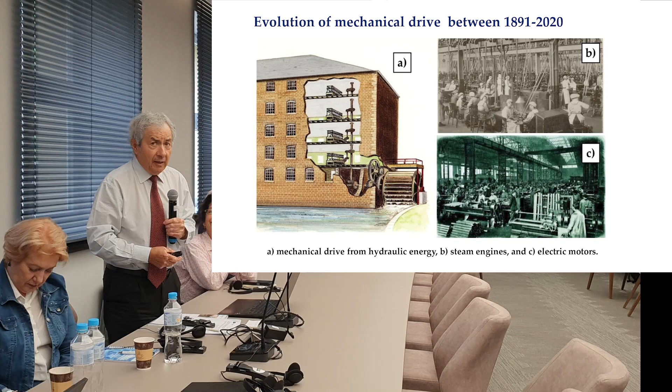There was a very important change in the world economy with the Industrial Revolution, which was initiated by using water power, namely textile companies. But when you are using energy from nature, you run into a problem. Sometimes there is no water.

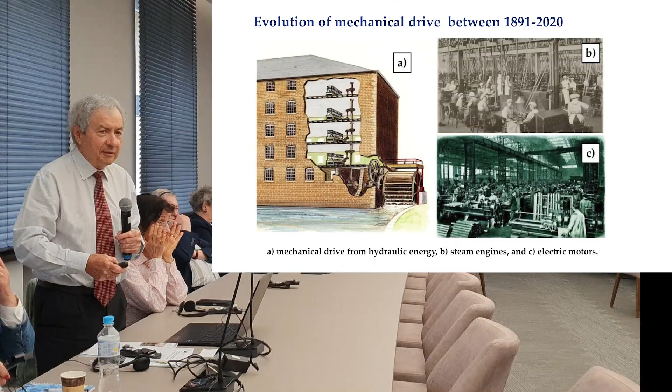So fortunately, around the same time in England, a steam engine was developed. So with steam, if you have enough coal or wood, the weather is not a problem. So basically, you change from the first factories based on water power to drive power based on steam power.

Even so, there is a common link between the two technologies. Namely, you have a prime mover and you had to distribute mechanical power inside the plant. You had shafts, belts, a mess in terms of operation. Fortunately, by the mid-19th century, electric motors were developed.

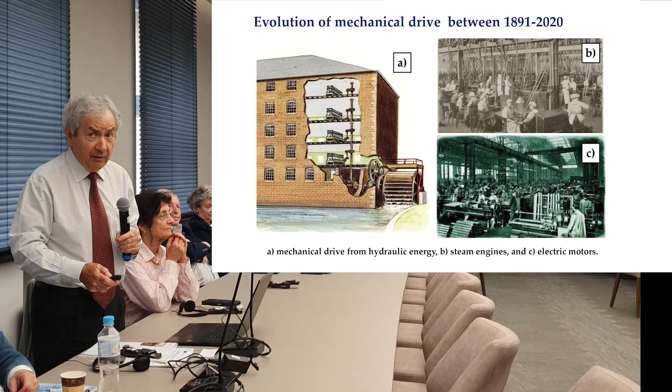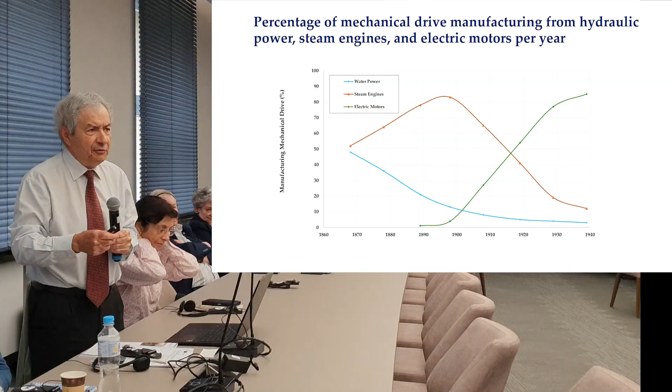But then, as the 19th century came to a close, there was a very fast change to electrification. It's really, if you think about it, in a space of a few years, you change from steam to electric motors in industry.

And when we situate how this evolution happened, we started basically - the most important driver in the Industrial Revolution was the steam engine. And then we moved to the second Industrial Revolution, which was based on electrification. And one of the key machines for electrification is electric motors. So it started, and electric motors have been evolving with different technologies, different capabilities.

Then, very importantly, around 1970, we had the invention of the microprocessor. Intel invented the microprocessor, and the use of electronic intelligence made sophisticated automation possible. And by the way, it also improved a lot how motors can be used. So there is a synergy between motors and electronics, as I will say later.

And more recently, we are running into the Internet of Things. That's also very important for motors. And more, the use of cognitive systems and artificial intelligence. So I would say that we have been going through a change that is accelerating, by the way.

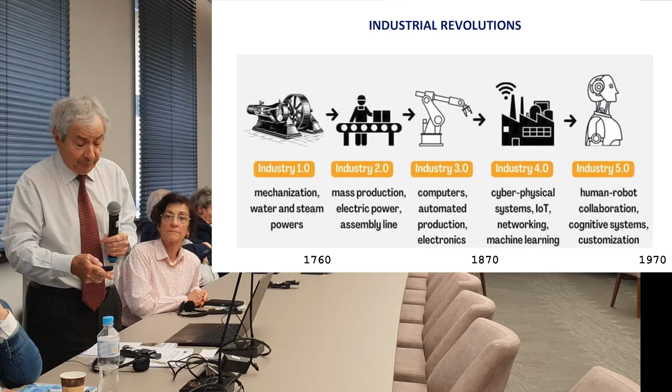Our hero, our superhero, which we are honoring today, was really an outstanding character. He was able to see very far in the future. There was not yet a three-phase system, but he imagined that if he had a three-phase supply, he could produce a rotating field and a very robust motor. So this is what makes a genius, to be able to see things that are not yet there.

So basically, the evolution for the squirrel cage induction motor is a very, very significant change in terms of capabilities compared with existing technologies. The induction motor compared with the previous motors, like DC motors, is much better in all respects. It has a higher power-to-weight ratio, is much more reliable, much longer lifetime, more efficiency.

It can be scaled. You can make very tiny motors. You can make multi-megawatt motors. So it's really absolutely amazing. And another capability that the induction motor also has, compared to other competing technologies, is its capability for direct online starting. Some sophisticated motor technologies are very good, but they need electronic controls. With the induction motor, you can basically start a motor directly from the network, which is very convenient.

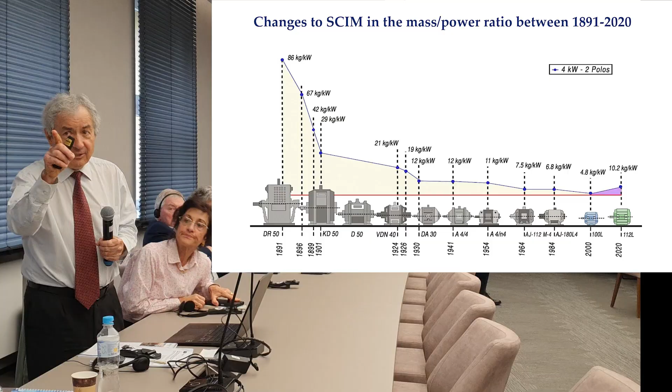Since then, a lot of evolutions have been implemented. The first induction motor was massive, a 4 kilowatt motor that weighed more than 300 kilos, extremely heavy. As you can see in this graph, there was a very significant trend to make lighter motors. Of course, a lighter motor uses less metal and is cheaper, and it's also important that the motor is not expensive. But you'll notice at the end that the trend to decrease weight reversed. I'll explain why later. It's sort of a paradox: the weight keeps dropping very fast and then suddenly starts increasing again.

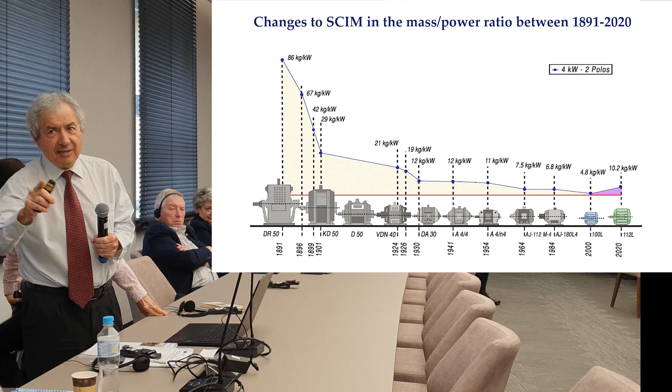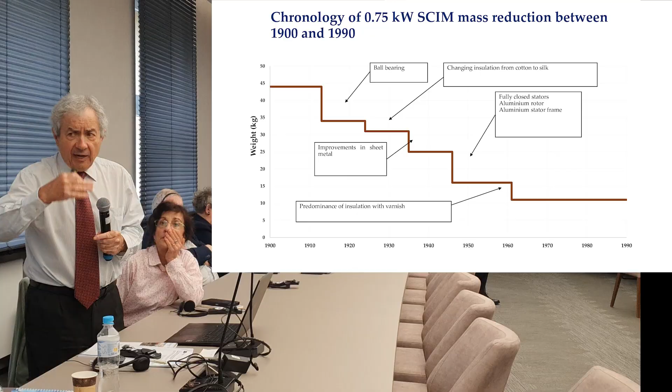So regarding why this happened, several important improvements were carried out. First of all, motors need support for the shaft, and the introduction of ball bearings produced a much more compact and much more reliable type of shaft support. Then other major improvements had to do with insulation, which was thick and didn't last long, so an evolution in insulation was very important. Also, in a motor you need coils run with current to produce a magnetic field, and you need a magnetic circuit to channel the magnetic flux. There were also very important changes here that I'll show in more detail. So basically all motors suffered a strong evolution in materials, construction, and design.

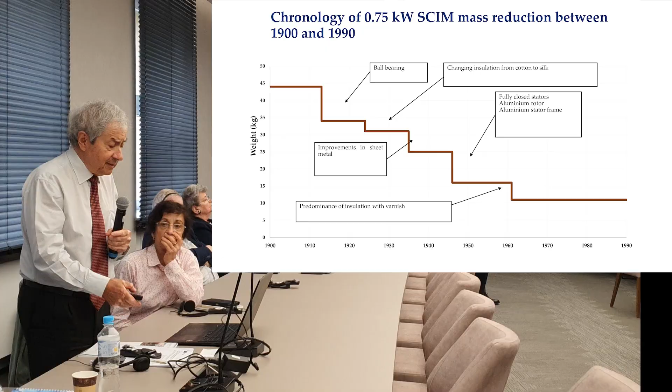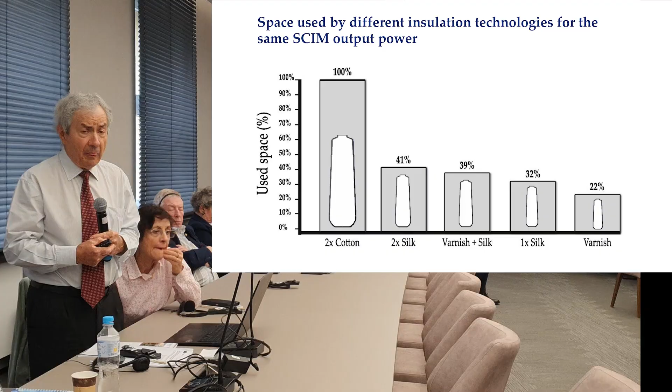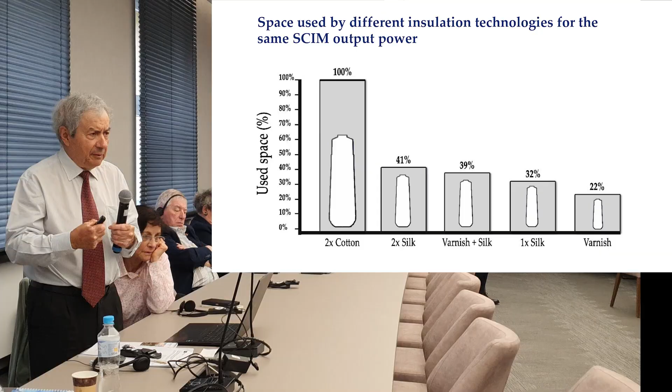This shows several cutaway views of insulation, starting with cotton, then silk, then a mix of silk with varnish, and finally varnish. Varnish is much better because it withstands higher temperatures, so it lasts much longer, and also because varnish is a good conductor of heat. When you have a coil with air voids, the transmission of heat is not as efficient. So it's important—it makes the winding more compact and improves heat transmission.

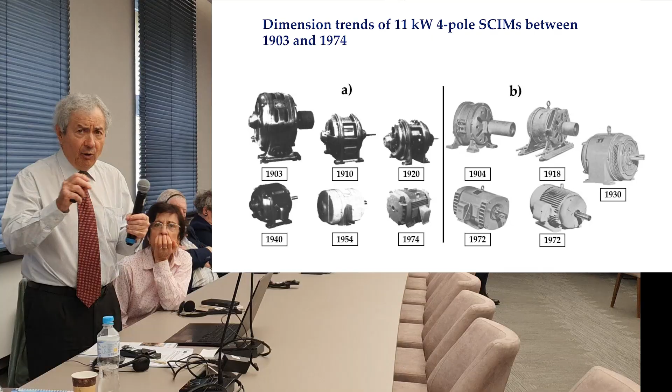This is an overview of how motors evolved over the past century, starting with open frame motors—large open frames for the same size, for the same power. All these motors are 11 kilowatt, so there was a drastic reduction in size and weight. The ones on the left are NEMA, that's the North America market; the ones on the right are Europe, IEC.

An important evolution you may notice is that initially you start with open frame motors, and later you go to enclosed motors. Why? If you're able to decrease the losses, you can avoid the entry of foreign materials into the motor—that's the way to do it. So you close the motors after there's a significant reduction in losses. You have a fan coupled to the shaft, and you'll see that in more recent motors the back part is a bit longer to accommodate the fan. So today, the vast majority of motors are totally enclosed fan motors.

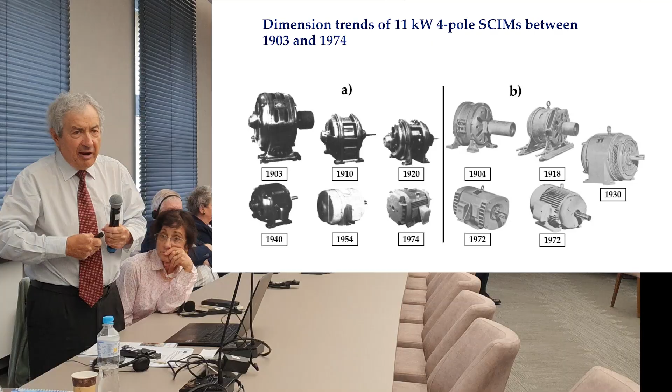By the way, I didn't mention—the induction motor is more than 100 years old. To be more precise, it's more than 130 years old. But if you go to industry today, more than 90% of motors are still three-phase squirrel cage induction motors. This shows how the technology, after suffering some improvements, is still the workhorse of industry.

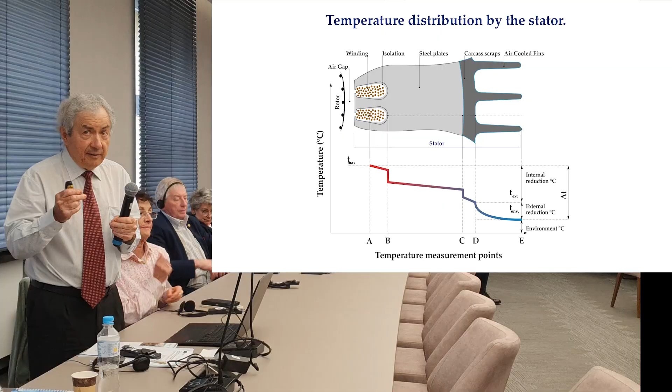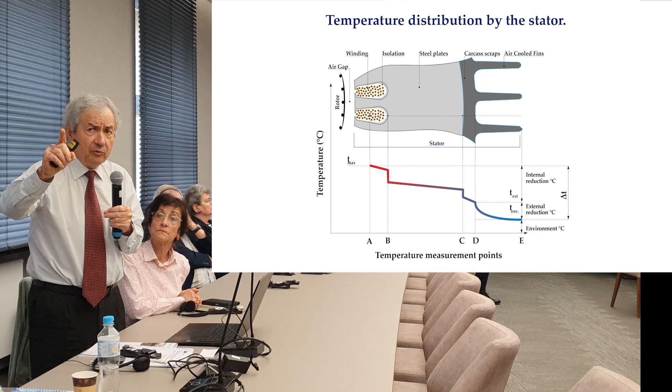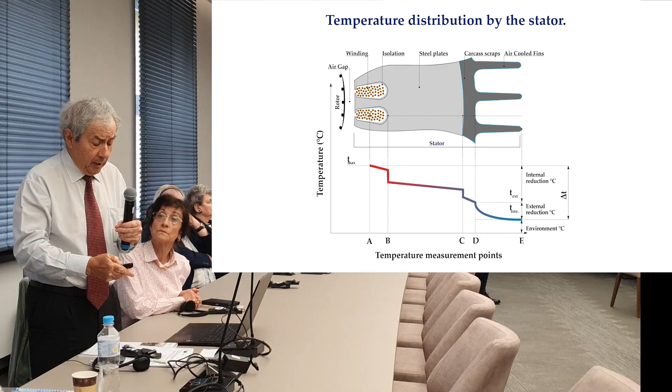Regarding one of the key issues: when you have a motor, you have current in the windings, and when you have current going through the windings, you have losses, and a challenge on how these losses can be removed. The new varnish insulation was a key step because it improves the release of heat from the grooves to the laminations. And you'll notice that on the outside, on the case of the motor, you'll see fins—these fins increase the external surface in order to improve heat transfer.

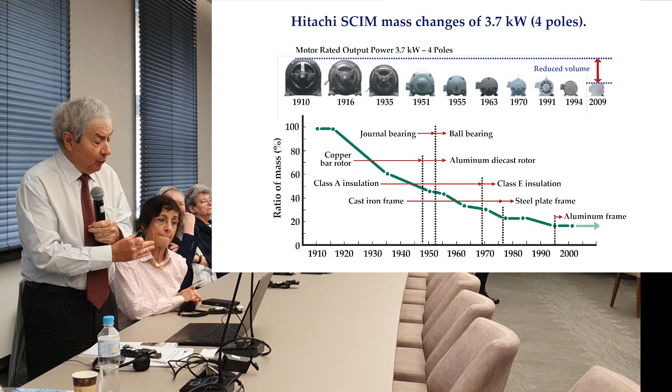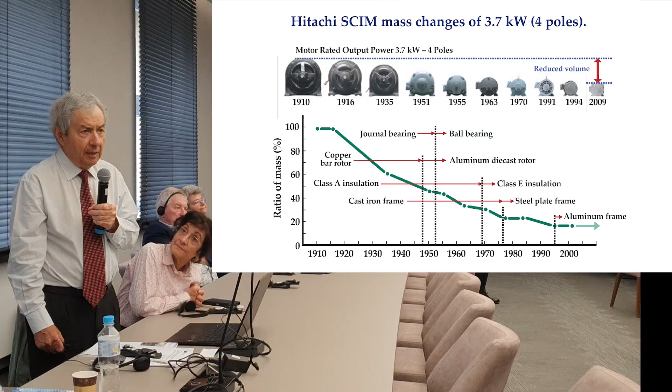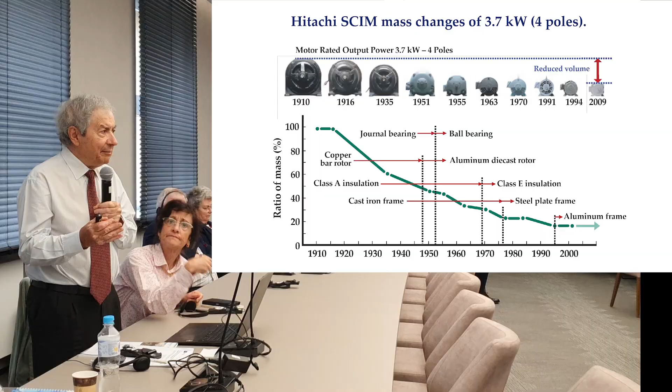When it comes to magnetic materials, there is also a very strong improvement in several ways. The magnetic material was made with higher permeability and higher resistivity by adding silicon to the iron, and also, very importantly, by using thinner laminations. Nowadays the laminations used are about 0.3 of a millimeter. But for transformers, an American company called Allied Metal, some two decades ago, developed a material called amorphous metal, and these plates are only 25 microns thick. So there are some companies experimenting with new motors that use this amorphous metal.

And basically, you slash the magnetic losses by 80%. You may see this happening coming into the market. So still a new improvement for motors, which might be possible in the near future.

You see here the evolution of motor efficiency for different power ranges during the last 80 or 90 years.

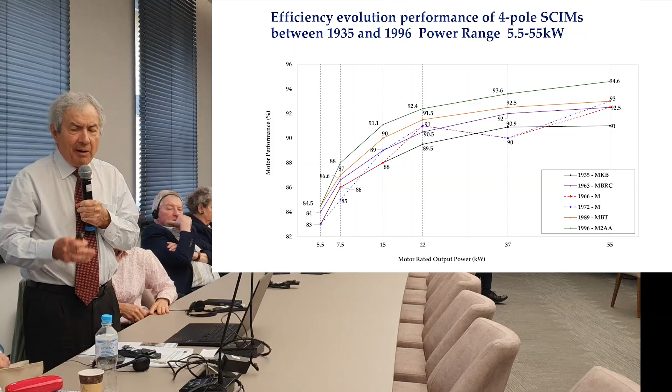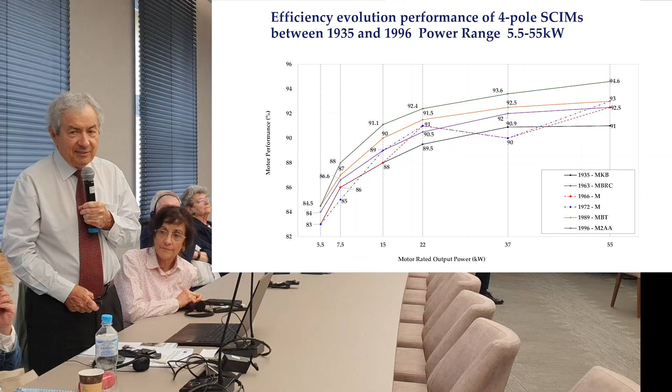You see something strange in the middle, that the curves - I don't have enough power here to project - but there are two lines that somehow are not improving much, and these lines refer to periods during the 60s and the 70s. Until the first oil crisis, electricity was very inexpensive, so manufacturers started making motors as cheap as possible by reducing the amount of copper and steel. This gave very inexpensive motors, but not a good choice because they use more electricity. So on a life cycle cost basis, it was not a wise decision to choose this type of technology.

This again shows how three manufacturers' motors improved through the years. You see the period of stagnation again, 60s, 70s, but there is a common situation: after the 90s, all improved very fast. Why is this? Because of incentive programs started in North America and also minimum efficiency standards. This was a stimulus for motor manufacturers to develop and introduce high efficiency motors into the market. So the same story, this type of stagnation in the 70s followed by an increase.

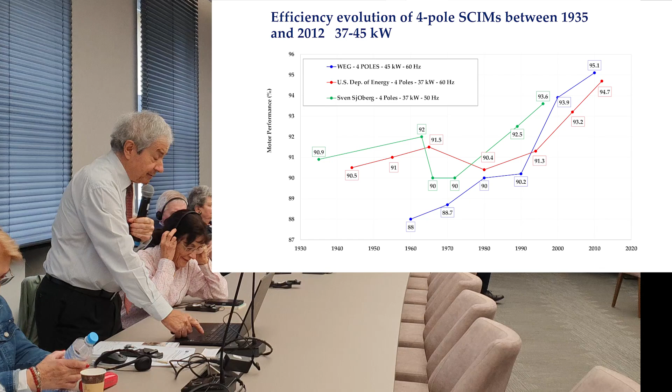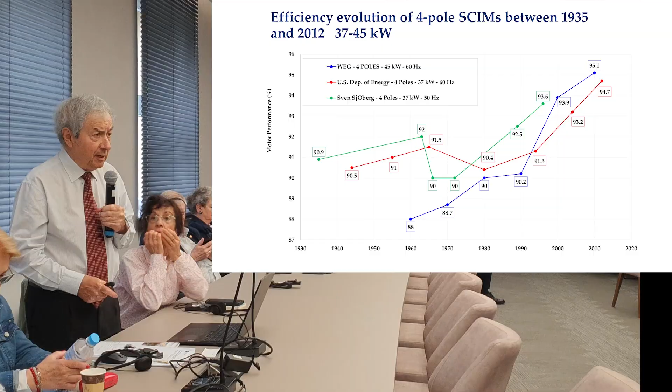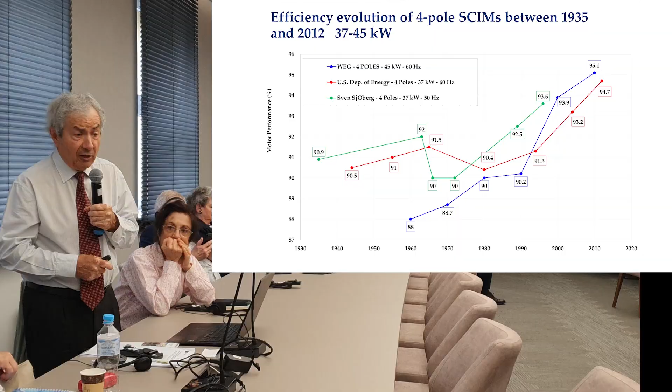When we look at the induction motor, it's quite good in terms of efficiency. We are speaking of motors that, depending on the power, have a full load efficiency of say between 80 and 95%, but still they have losses. So how can you cope with this?

The highest losses, the largest, are the stator losses, the windings. And what can you do here? You can improve winding techniques, reduce the coil heads, use concentrated windings. So manufacturers are designing in this perspective.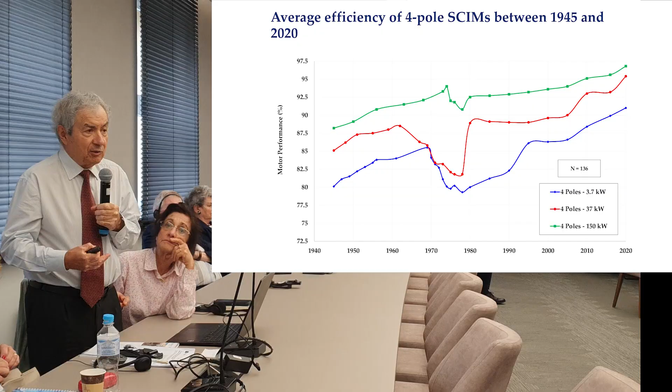Rotor losses - this is the principle of induction motor by using squirrel cage. By using squirrel cage with larger cross section, you are able to decrease the rotor losses.

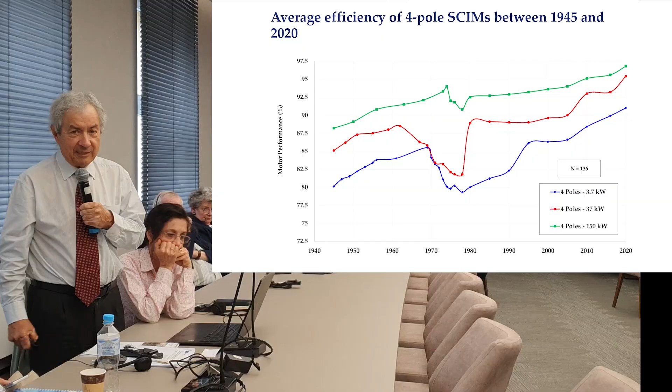If I would point to a less good aspect of induction motors, I would point that the rotor in an induction motor is always late. He's always trying to get the rotating field, he moves after the rotating field, but never is able to catch it. And there is a penalty, and the penalty is the rotor losses. If you are able to develop a technology where the rotor accelerates and catches the synchronous rotating field, no more rotor losses - you slash them, rotor losses are magnetic and electric, you cut them to zero. If the slip is zero, you still have the mechanical losses, but that would be a tremendous improvement.

And some manufacturers are working on this, on a kind of hybrid design in which the motor starts by induction and then runs at synchronous speed.

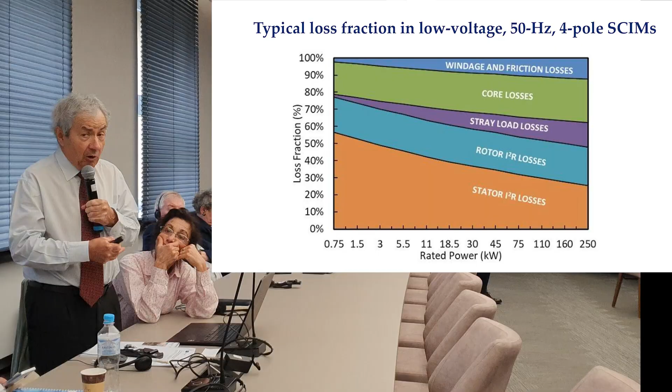Stray losses can be reduced by better design to minimize leakage. Core losses - better magnetic materials. It's happening progressively, particularly if we go into amorphous materials. Don't think it's something that cannot be done. In Japan, 50% of distribution transformers already use amorphous metal, because a transformer is connected 24 hours per day, and most of the losses in a distribution transformer are iron losses. So when they move to amorphous, it's really very important.

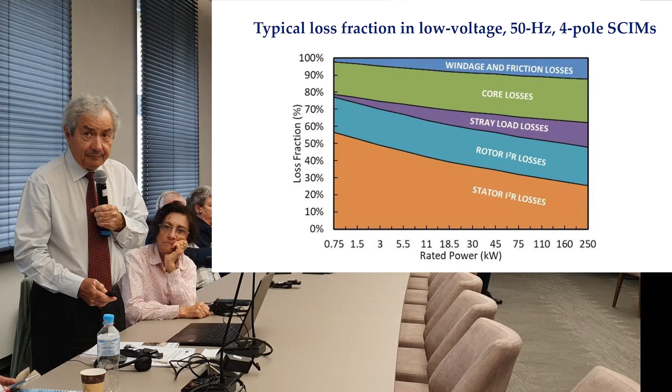So in this graph, there is an overview of the areas in which induction motors have evolved a lot during the last 100 years. And all basically go in the same direction: make the motor more efficient and more reliable. And the two things go together.

So I think the induction motor was a great invention, and is getting even better with this type of progressive improvements.

This is an interesting figure. When there was the introduction of energy-efficient motors in the 90s, you see two motors sharing the same case - one is a standard motor. From the outside, they look the same. But if you cut the case, what you see is the efficient motor, basically inside has more iron and more copper. Very easy to understand.

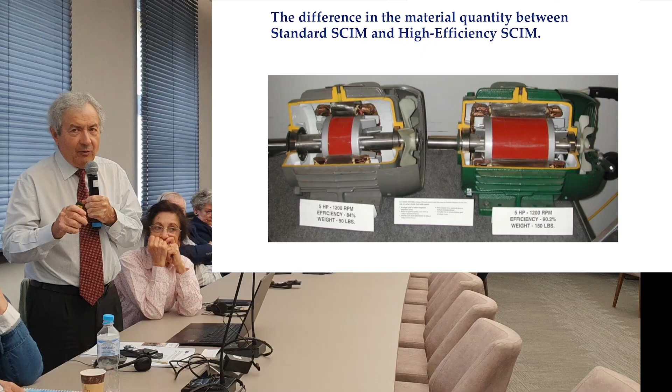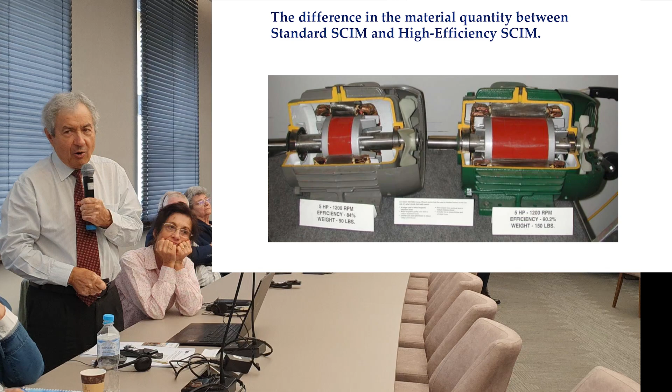Basically, the electric losses depend on the resistance of the windings, so if you put more copper, you decrease the copper losses. With magnetic steel, the same story, because the magnetic losses are proportional to the square of the flux density, so if you use more magnetic steel, you are decreasing the density. So if you want to explain to a person who is not an engineer what's the difference between the two motors: the more efficient motor has more copper and more steel. To say it in very, very simple words.

So is it still possible to improve the induction motor? Yes, it is. We already spoke about new magnetic materials, the use of hybrid rotors to make the motor synchronous. And there are some people, particularly a company working on axial flux motors. Axial flux motors are more compact and allow the use of concentrated windings. I'm not aware of an induction motor of axial flux on the market, but there are axial flux motors. Modern elevators use axial flux motors, but they're permanent magnet motors, not induction motors. So the field is still evolving.

And in terms of efficiency, before the year 2000, when you buy a motor in Europe and look at the nameplate, you had power factor, current, voltage, but no efficiency. A shame. You buy something that uses a lot of electricity and the efficiency is not written on the nameplate. Not anymore. Now IE classes are defined, like hotels have classes, 1-star to 5-star hotels, motors also have stars.

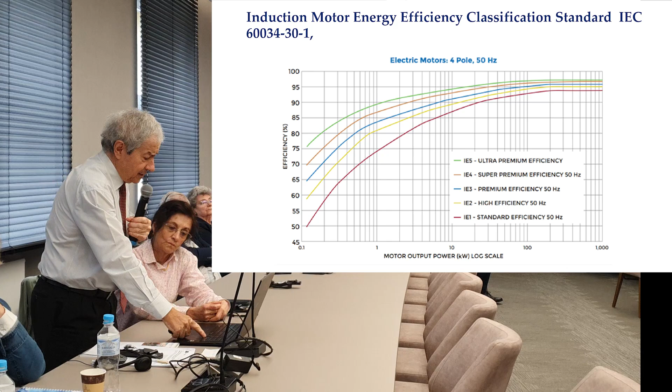So now you have classes defined on a world basis by IEC, adopted everywhere, China, USA. These classes, as we see here, there has been a trend moving up the scale on these efficiency values. In terms of engineering, there are many research groups around the world trying to improve the performance of the motor along the lines I mentioned.

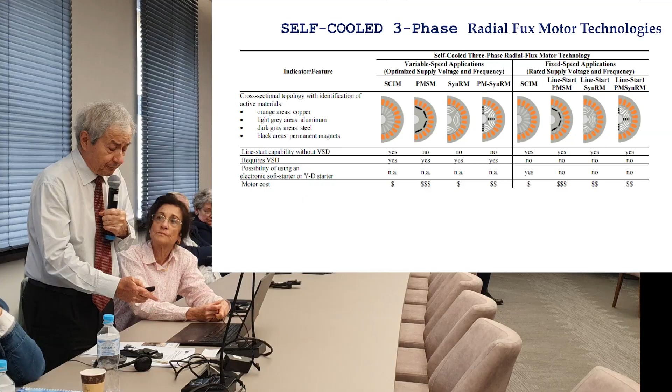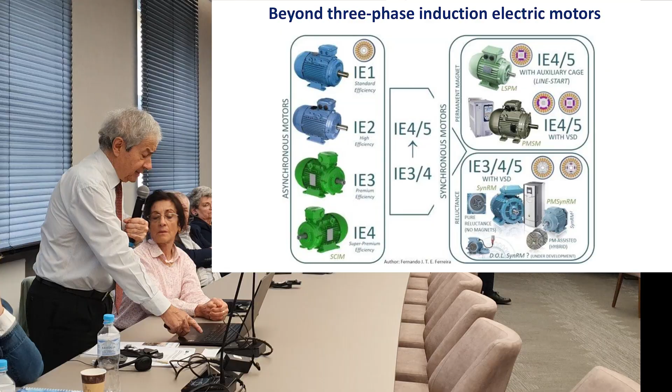And in the market right now, you have induction motors going from IE1 to IE4. Why not IE5? Because the amount of active materials would make the motor too heavy. So to go to IE5, there are technologies, namely permanent magnet synchronous motors or synchronous reluctance motors, which can achieve IE5 performance with a smaller amount of active materials.

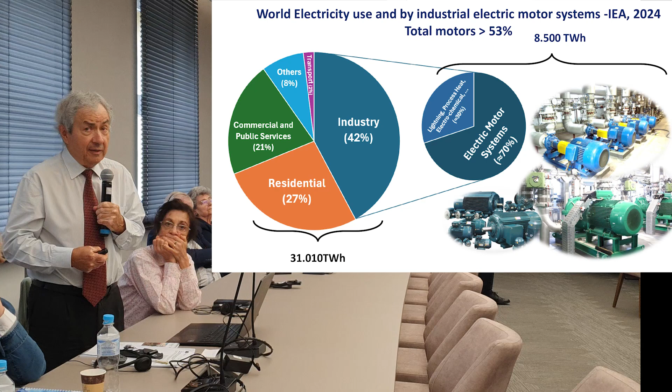Why is it so important to keep moving the efficiency? Because motors in total use more than half of total electricity used in the world, not just in industry. When you go to buildings, now not just elevators, heating and cooling are being done more and more with heat pumps. So there is an ongoing electrification of buildings, and the importance of motors, already more than half, has become even more important. So in terms of policy towards sustainability, it makes a lot of sense.

Minimum efficiency standards around the world: North America was the pioneer, 1997. DOE published the first energy efficiency standards, and then it has been a virtuous circle. Other countries are moving, so it's a success story because it's a win-win situation for everybody. People save money in their companies by using more efficient motors, and because we use less energy, there is less pollution. So this is really moving.

So since July 2023 in Europe, it is compulsory to use IE4 motors from 75 to 200 kilowatts, and the standard is going to be extended because the manufacturers said, well, if we have to make IE4 motors for smaller motors, we need time to adapt. But the idea is that very soon in Europe, IE4 will be compulsory. DOE is also projecting to do the same by 2027.

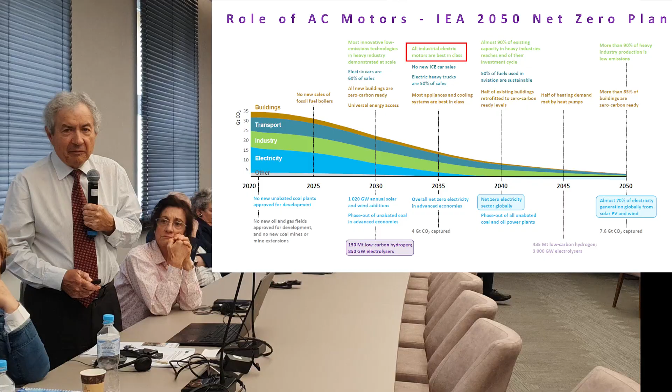So this is quite a successful story, the motor market transformation which has occurred around the world. The International Energy Agency, in the net zero roadmap to 2050, states that by 2035, all motors sold must be IE5. So because of their importance, it's really very important that we look at this.

So finally, in the beginning, when I spoke about the evolution of industrial revolutions, I mentioned that we are witnessing the introduction of technologies which are synergistic, namely electronics. An induction motor, if you connect it to the grid, basically operates at almost constant speed. But if you connect it to electronics, you can change speed and torque. You can optimize, you can do energy recovery, like in an elevator. When you go up, you go down, you can recover the energy. So this is very important to consider.

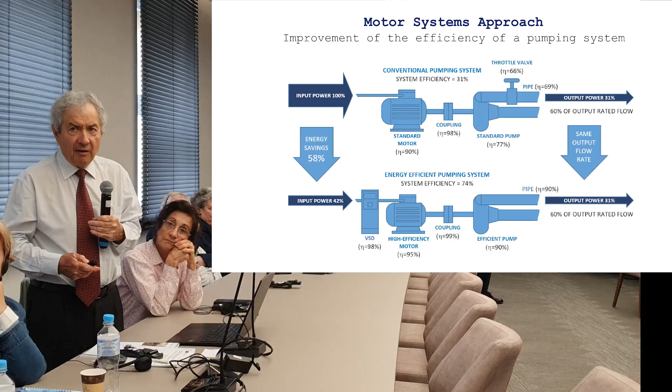It's like an orchestra. The motor is like the heart of the system, but all the rest is also very important and has a lot of influence. This is an example of a pumping system in which you may save 5 or 6% with the motor by putting in an efficient induction motor. But if you optimize the whole system, the pump, variable speed drive, you save maybe 50, 60%. So digitization is also very powerful.

New technologies related to cognitive systems and artificial intelligence. So I would say that motors will keep being more and more important, and I think the future is bright, and we have to thank people like Mikhail Dolivo-Dobrovolsky for his outstanding invention. Thank you for your attention.